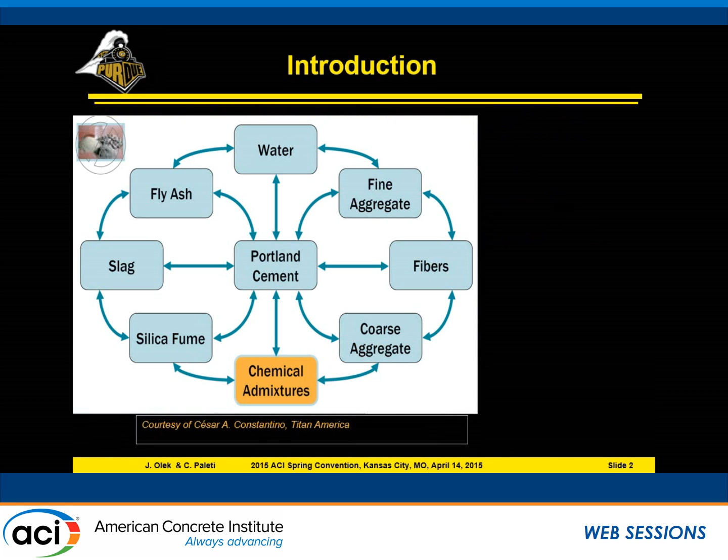What I wanted to share with you is part of rather extensive work that we've done on looking for coming up with a method of, maybe not so much predicting, as practically checking for potential incompatibilities with admixtures in modern cementitious systems. We know that modern mixes typically contain quite a few components, and once you start putting all of those components together, they don't always seem to work.

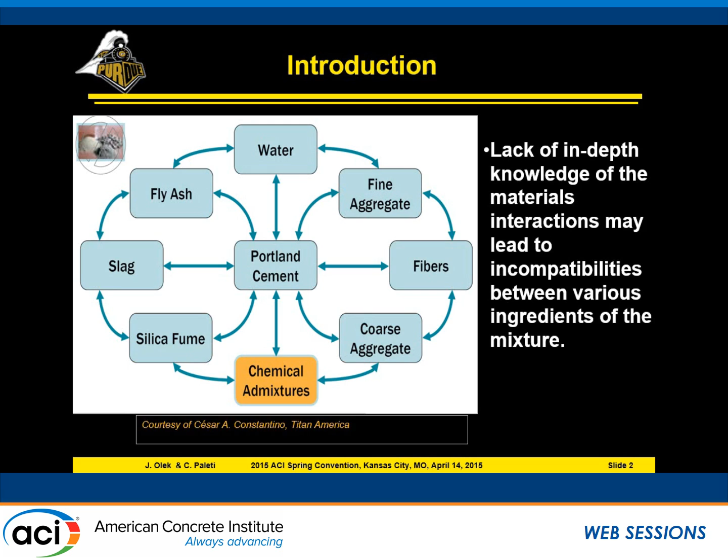Sometimes what happens is that you develop undesirable loss of properties, which we call incompatibilities. So what is compatibility? Loosely defining it as interaction of admixture with the cementitious system that doesn't cause any problems. Conversely, incompatibility would be a situation where, upon addition of a particular admixture, the mix does not behave as expected.

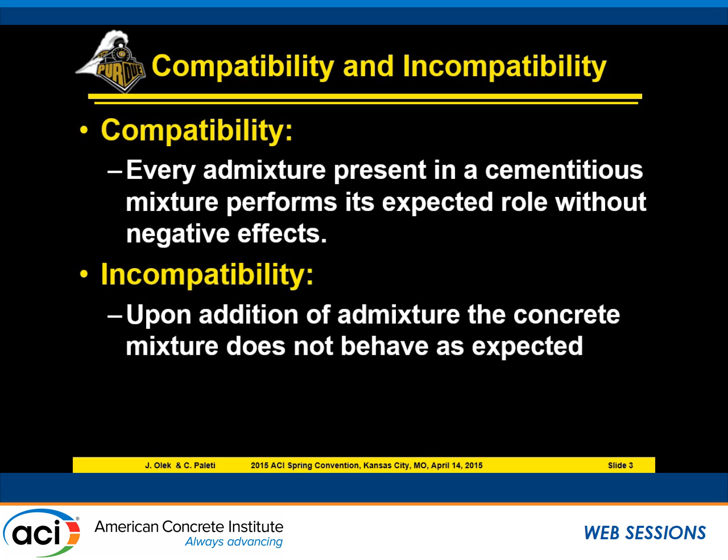Then you may get a phone call saying, what do I do? We switched the fly ash, we switched the cement, everything worked perfectly before and now it doesn't. Everybody realizes that the reason for those incompatibilities is really coming from the fact that the admixtures interact with hydrating cementitious systems.

We have a pore solution full of various ions that come from all the components, and chemistry starts playing a role. If the chemistry is not right, you will have incompatibilities.

So the effect of admixtures will depend on dosage and the type of admixture being used, the composition of the mix itself, as well as the composition of the admixture, sequence of addition, water-cementitious ratio, temperature, and finally compatibility of admixtures among themselves.

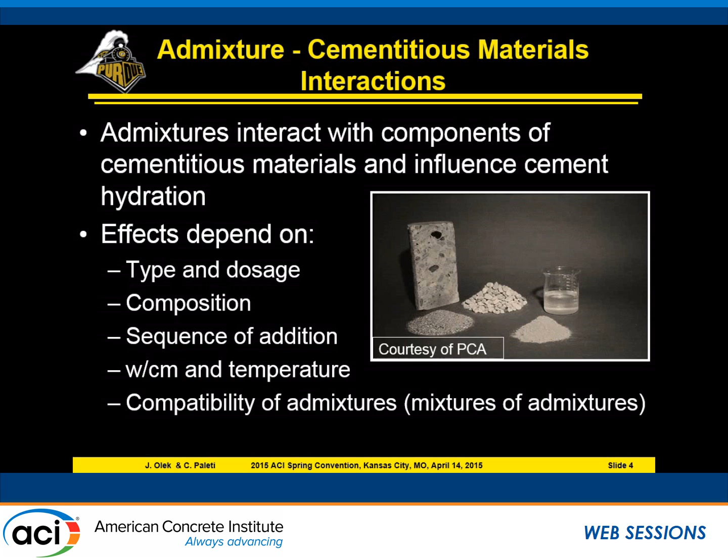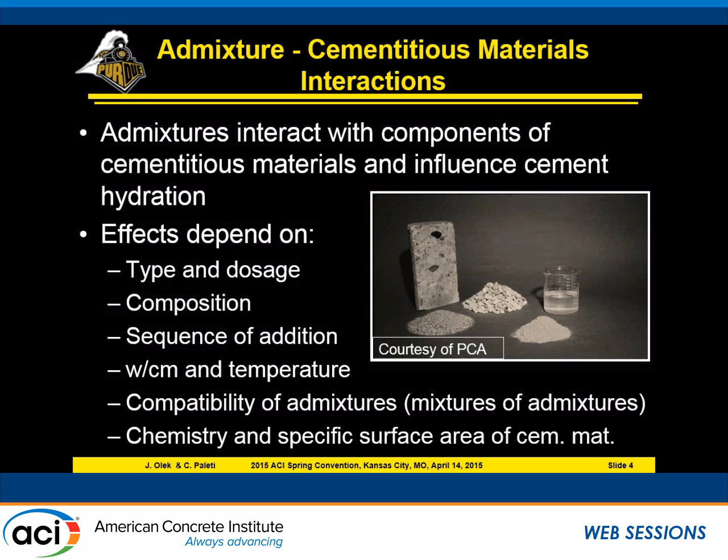If you buy the admixtures from the same supplier, typically those are vetted, if you will — they're supposed to work okay. If you start using an air entrainer from one supplier and a water reducer from another, that sometimes may lead to problems. Also, the chemistry of the cementitious material itself and its specific surface area may play a role.

So the issue of incompatibility among the components of concrete mixtures and chemical admixtures themselves is not entirely new, of course, and over the years the manufacturers of admixtures developed pretty robust systems that seem to work.

But just to give you a brief overview, with respect to early age properties, the incompatibilities that we see often manifest themselves as premature stiffening or severe set retardation. In addition, under certain circumstances with a specific combination of admixtures, you may have a problem entraining and maintaining the air void system.

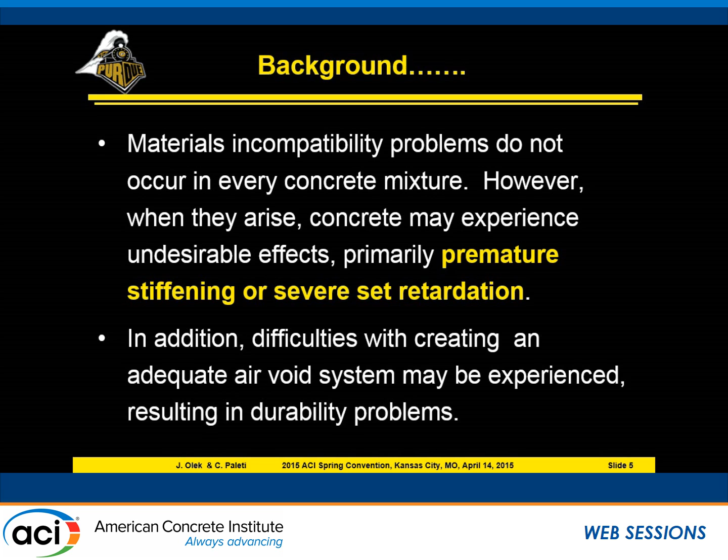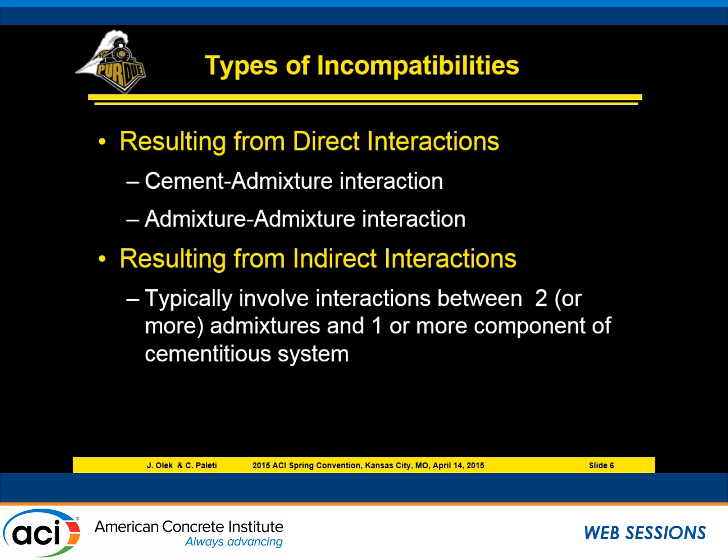If you start analyzing what might lead to those incompatibilities, you will quickly become aware that you may have cement-admixture interactions — that's pretty obvious. You have the possibility of admixture-admixture interaction that I already briefly mentioned. Or you can have sort of indirect interactions that are combinations of the above.

Let's look at some of the components that are really critical when you start talking about incompatibilities in these systems. The tricalcium aluminate plays a big role because that's the compound that starts reacting very quickly right after water is added to the cement. And we, in fact, make our cements with that in mind.

We are controlling the reaction of C3A by interground clinker with gypsum, right? But if we don't have the balance right, or if we don't have enough sulfates, or we have too much sulfates, we may have a problem. And if the admixture introduces sulfates to the system, that will upset the balance as well.

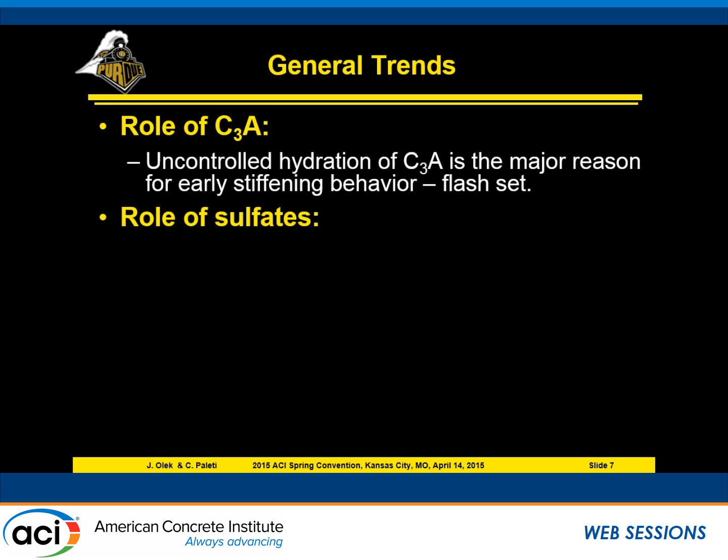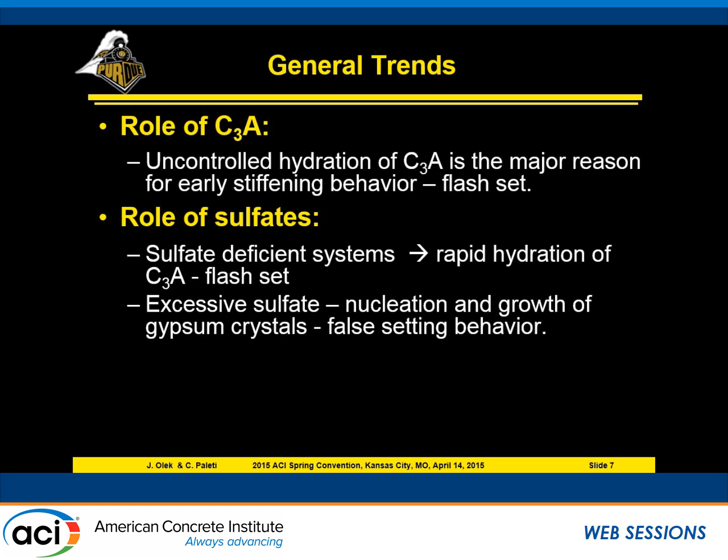So if you have uncontrolled setting behavior, you will have a flash set. Sulfates also obviously play a role because they control the hydration of C3A. If you have a system that is deficient in sulfates, you will have rapid hydration of C3A, and you will have a flash set. If you have excessive sulfates, you may have a situation where you start generating precipitation of gypsum crystals, and you have what we call false setting behavior.

Not only is the amount of sulfate important, but also how soluble the sulfate is — that is very important.

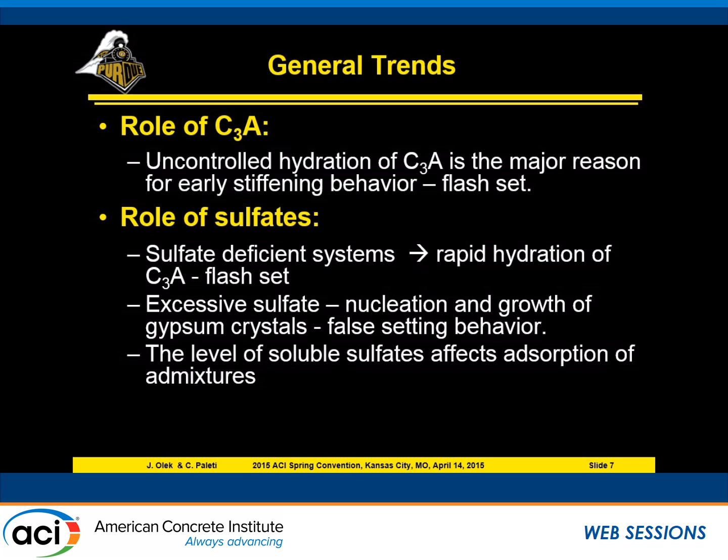So the form of the sulfate that you will find will be also of some consequence. As an example, I am showing the solubilities of 4 different types of sulfates that you may encounter in any cementitious systems. You can obviously have anhydrite, and whether it's a natural or synthetic anhydrite will make a big difference. Natural anhydrite is not very soluble. Synthetic anhydrite is comparable in solubility to hemihydrate or to gypsum.

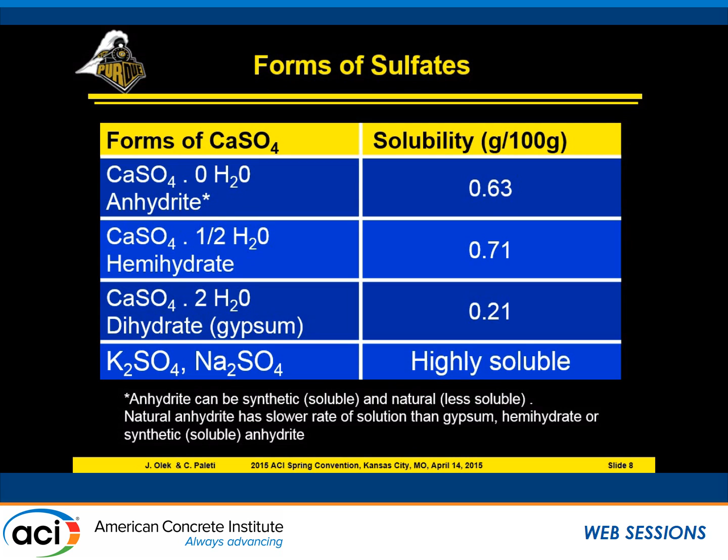Sulfates of potassium and sodium, which are always present in cements, are very highly soluble, and those sulfates come into the system very rapidly once you introduce water.

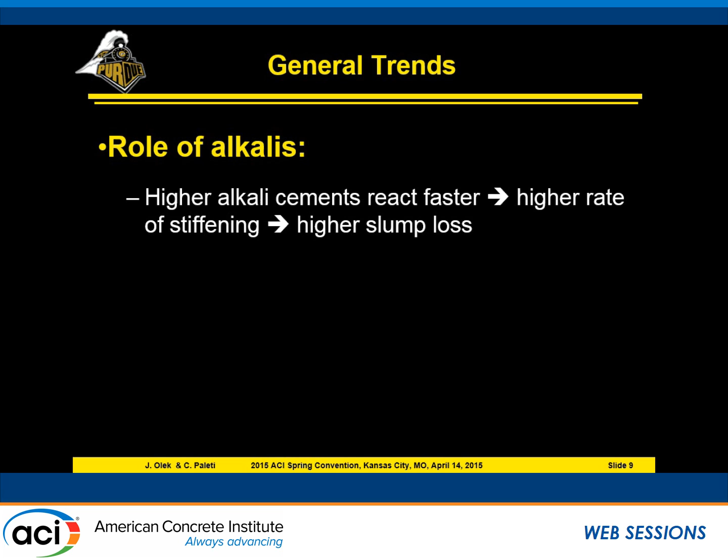Since we were talking about sodium and potassium sulfates, alkalis themselves, alkali metals, they play a role. You may have a situation when you have a higher alkali cement, the rate of hydration of those cements is going to be faster. Since hydration progresses faster, you will have the appearance of a higher rate of stiffening, and you will have a potential for slump loss.

With respect to the amount of admixtures that you would be adding, you will see that dosages are often in direct proportion to the alkali content of the system. If you have a low alkali content system, you will have also lower stability of the air void system. So everything is interrelated, right? In particular, if you have low alkali cement and synthetic air entrainer, you may have problems with strength loss.

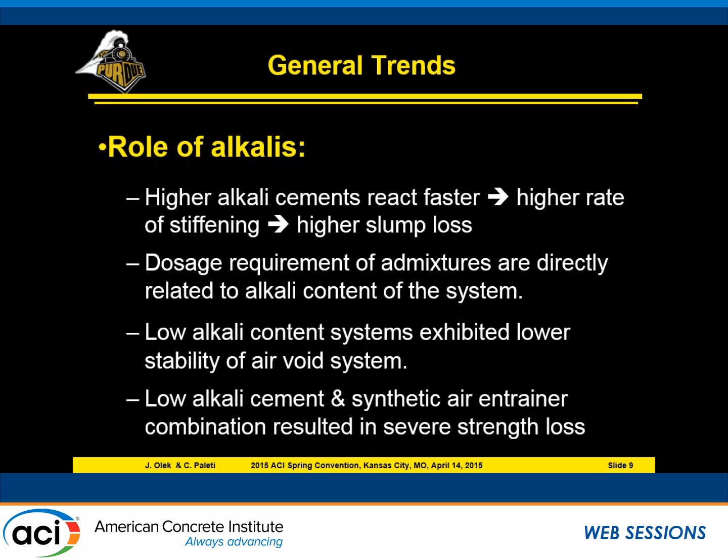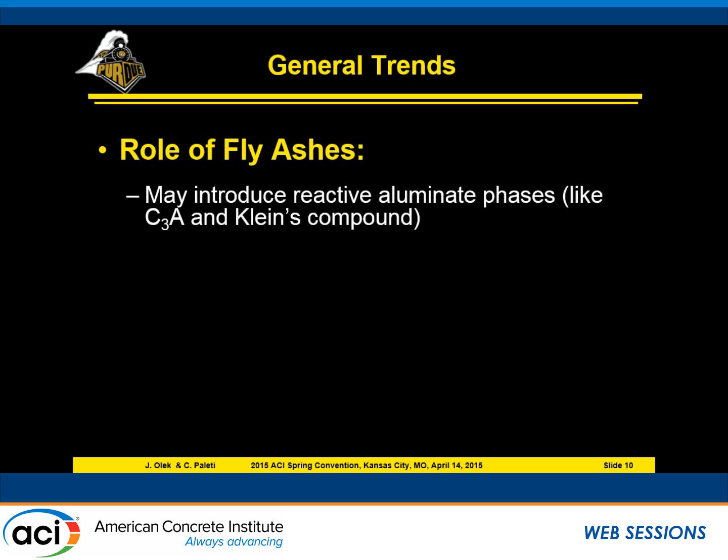We also have fly ashes or other supplementary cementitious materials. My talk today is going to focus on the fly ashes, so I will talk about the role of fly ash. We know that fly ashes are mostly aluminosilicate glasses with some other minor components, but they, among other things, introduce reactive alumina into the system, which has to be controlled in addition to the need to control C3A. They also introduce sulfates, and those sulfates, if they are soluble, disturb the sulfate balance.

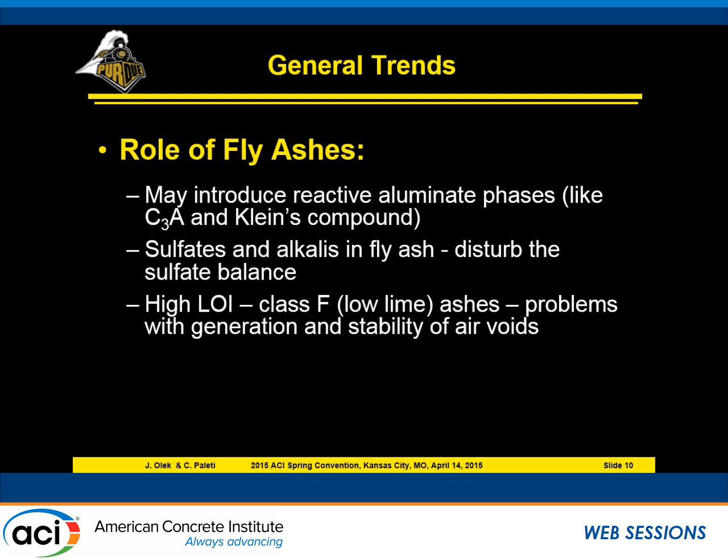If you have class F fly ash with a high loss on ignition, you may have a problem with air entrainment. Also, if you have calcium and magnesium in the fly ash coming into the system, you may have a problem with air entrainment because you may have some precipitates forming. These are chemicals that constitute the air entraining admixture.

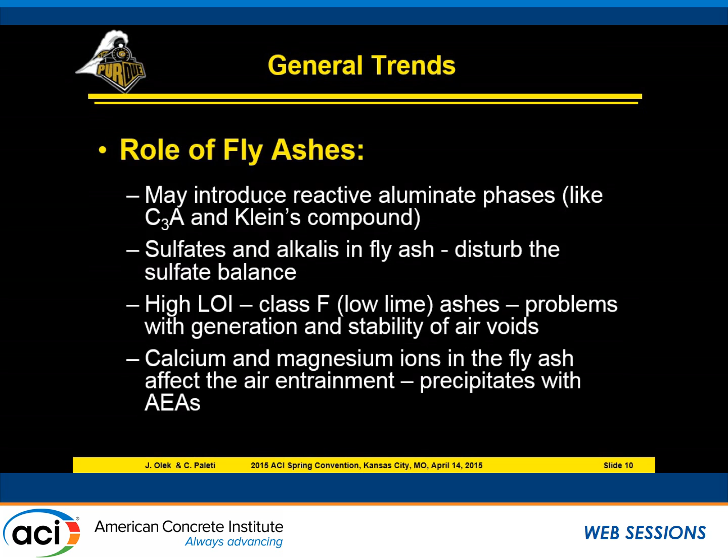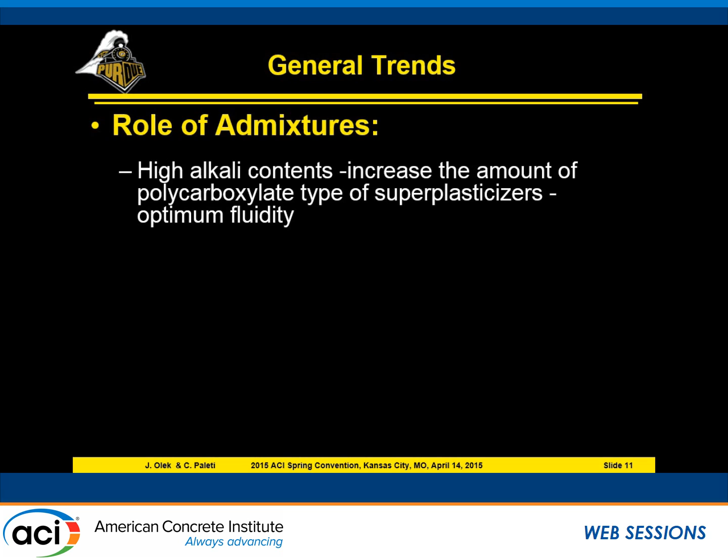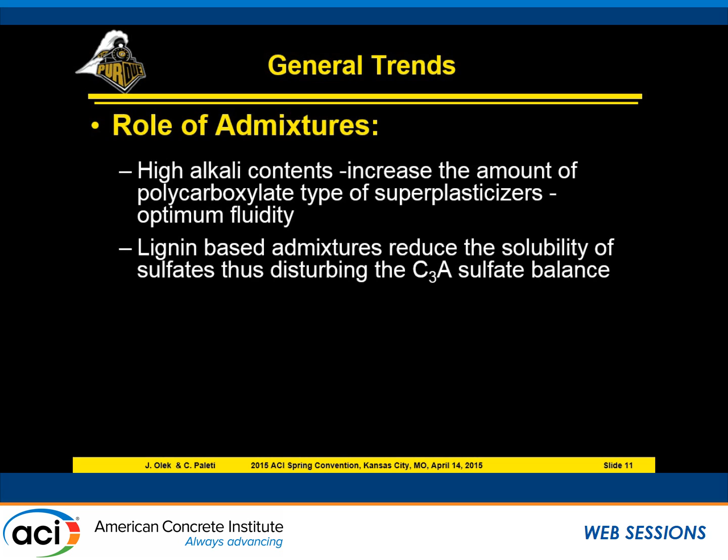So, to sum up, with respect to the role of alkalis, if you have a system with high alkali content, you typically have to increase the amount of polycarboxylate type superplasticizer to maintain optimal fluidity. If you have lignin-based water reducers, they reduce the solubility of sulfates, therefore they have a disturbing effect on the hydration of tricalcium aluminate.

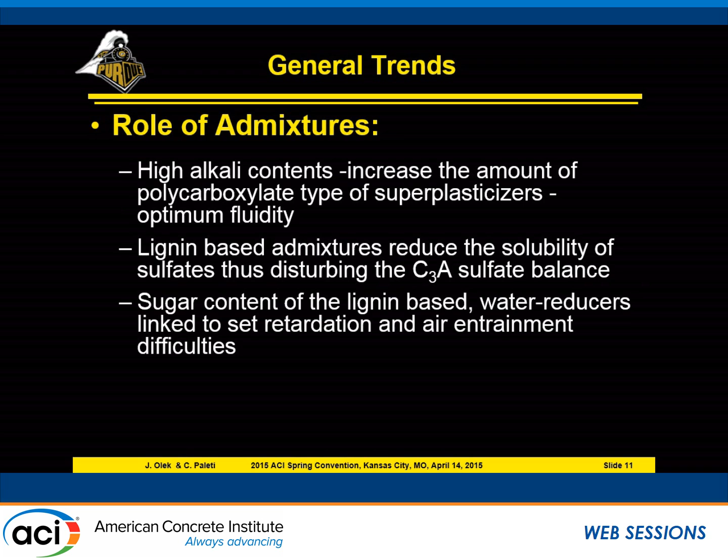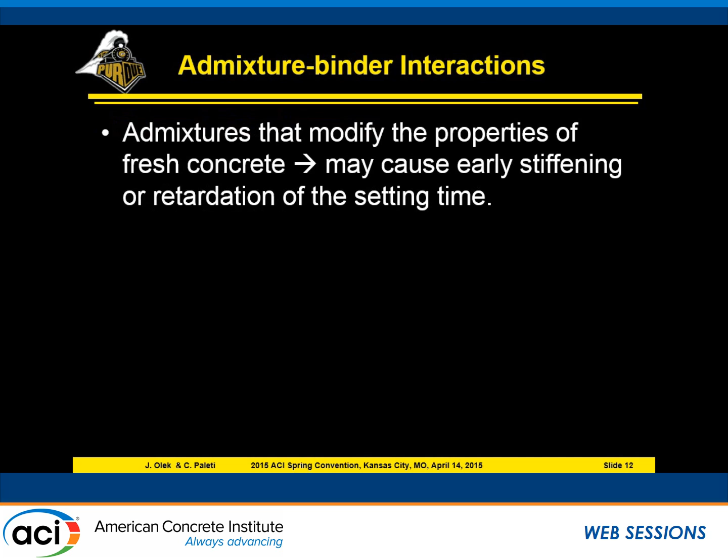Furthermore, if you have sugar in the lignins, you can have a problem with set retardation and also air entraining difficulties. There are admixtures that can modify the properties of the fresh concrete. Those interactions will affect stiffening or retardation of the setting time. Very often that change in stiffening is really a function of the rate of hydration of C3A.

There is also a potential problem with overdosing of the admixture. Sometimes either malfunction of the equipment or lack of attention by whoever operates the admixture dispensers may result in accidental overdosing of the admixtures. We look at that as well.

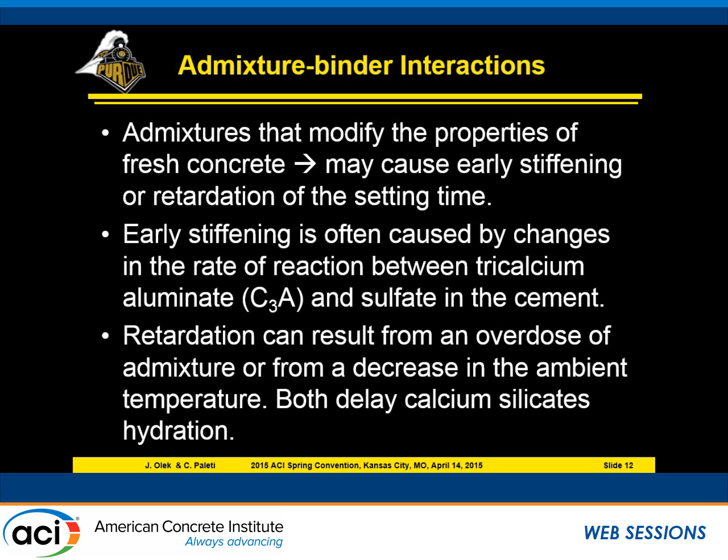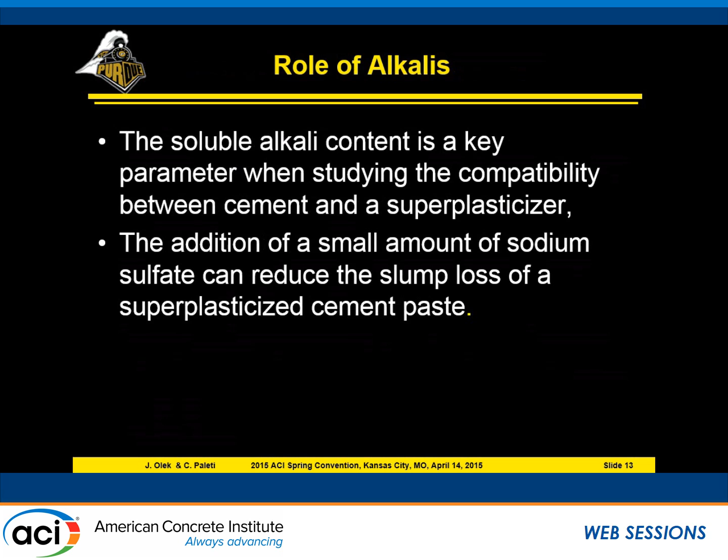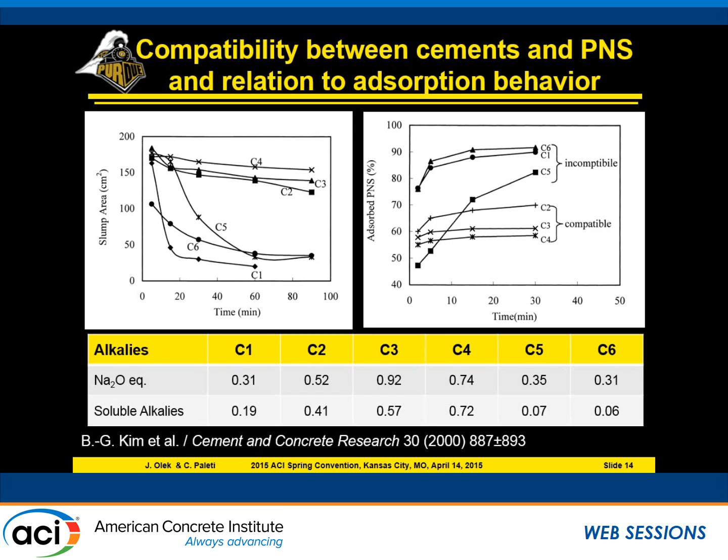But if you look at how the adsorption of superplasticizer or water reducer changed as a function of the chemistry of cement, you can see that C2, C3, and C4, which had high solubility, were compatible, versus C1, C6, and C5, which were incompatible. So not only the alkali content, but also solubility is important.

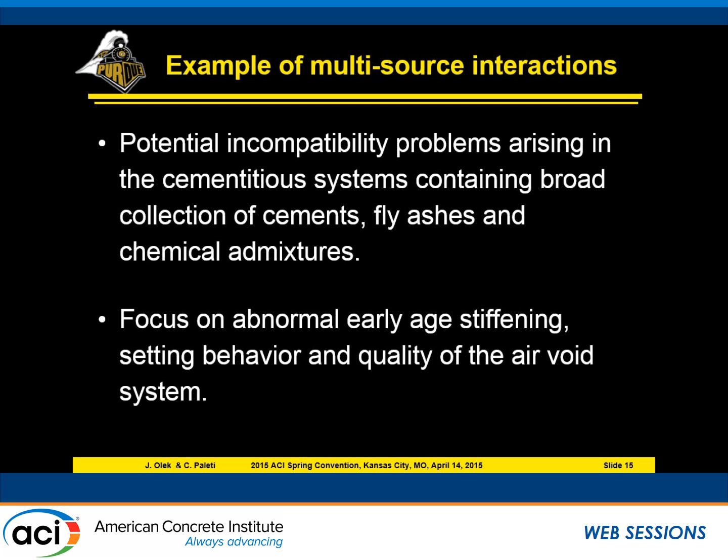So what I am going to do in the rest of my presentation is give you a quick overview, really an example of multi-source interactions and some suggestions on how those could be followed and potentially developed into a system that will prevent them from happening. So we will be looking at potential incompatibility problems in systems that have various cements, various fly ashes, various chemical admixtures. I will be focusing on abnormal behavior related to setting and also to the quality of the air void system.

So what we've done, we've collected 20 different fly ashes. We perform analysis of loss on ignition and chemical analysis. We also look at soluble sulfates and alkalis, particle size distribution, magnetic particle morphology, strength activity index, and so forth.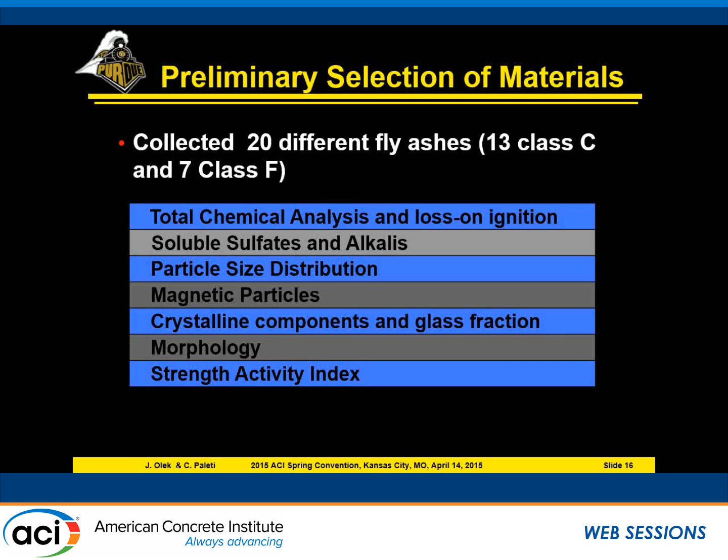13 of those were class C fly ashes and 7 class F ashes. You can see the range of chemical compositions and also a range of physical characteristics.

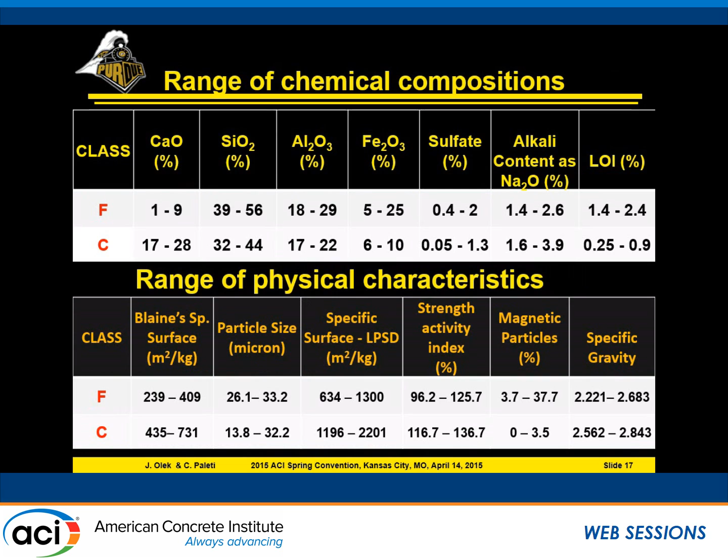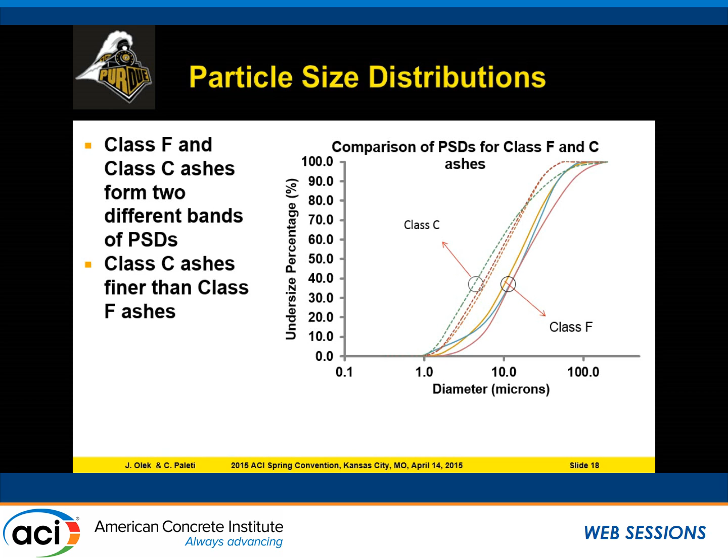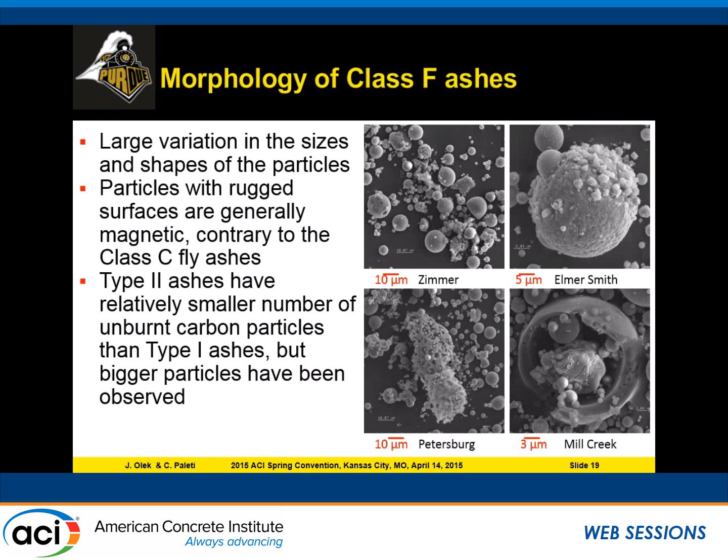A couple of examples of morphologies of class F ashes. The interesting thing I want to point out is that very often the deposits on the surface of the class F ash were not sulfates, but they were very often magnetic type of particles. That was in contrast to what we were seeing in class C ashes, where all those deposits that you see were highly soluble, either sodium or potassium sulfates.

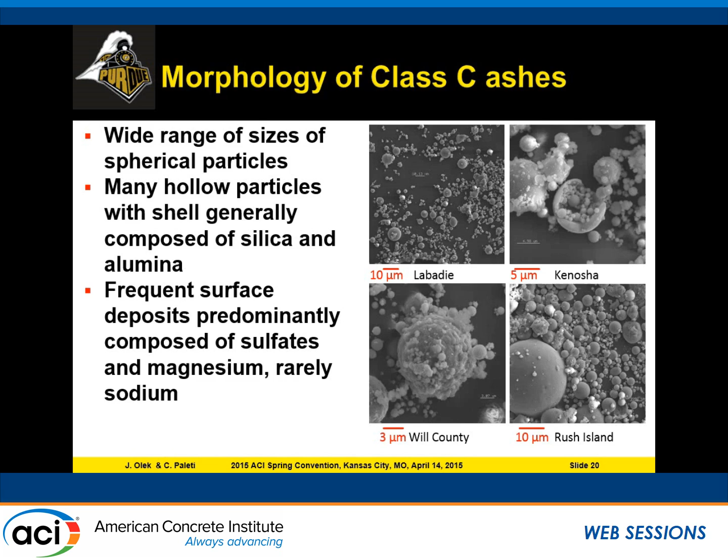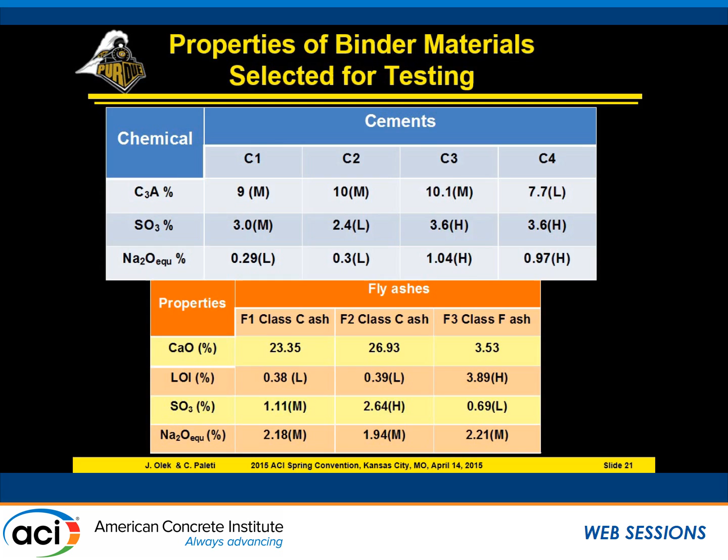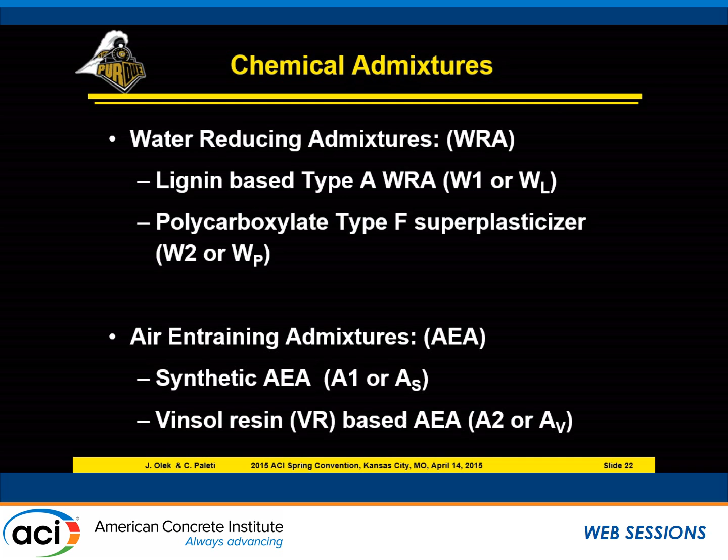We used 2 types of water-reducing admixture. One was lignin-based water-reducing admixture, WL, and another one polycarboxylate, WP. And we used 2 types of air entrainers. One was synthetic, and one was Vinsol resin.

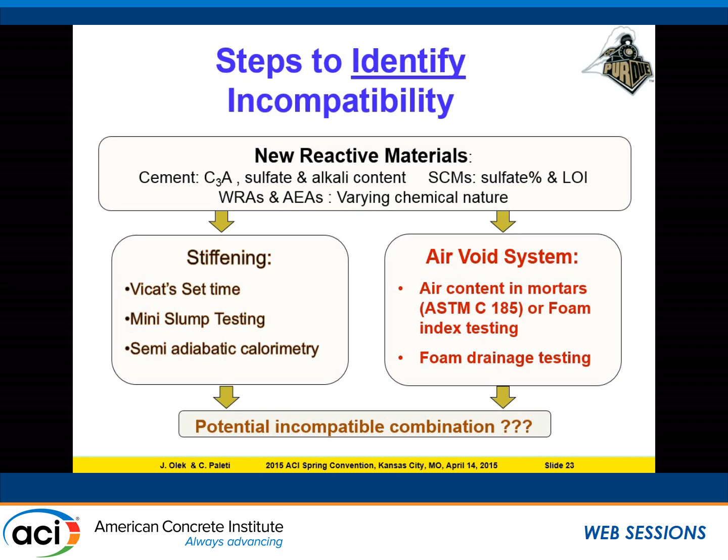So this was sort of a flowchart that we followed. We put the materials of interest together. We look at the stiffening parameters: VICAT, mini-slump, semi-adiabatic calorimetry. We also look at the air void stability using the foam drainage test. I won't have time to present that here, but we've done that. And we look at the potential combinations. We've done it on paste, we've done it on mortars, and finally we've done it on concrete.

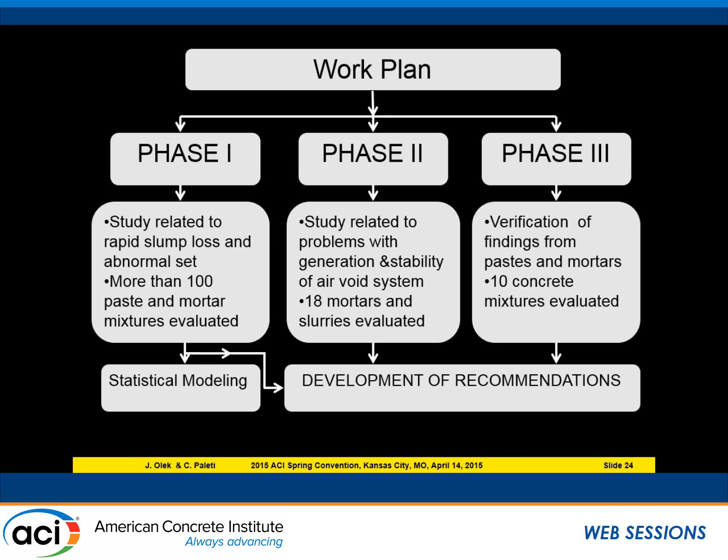We've done some statistical modeling trying to come up with the variables that seem to be statistically significant with respect to incompatibility, and developed some recommendations.

So with respect to mini-slump testing, we developed 2 indices. One of them we called the false set index, which was the area of the patty after 5 minutes over the area at 2 minutes, and if that was greater than 1.3, we deemed that to be illustrating a false set. Then we also have a stiffening index, area at 30 minutes versus area at 5 minutes. If that was less than 0.8, there was a flash set.

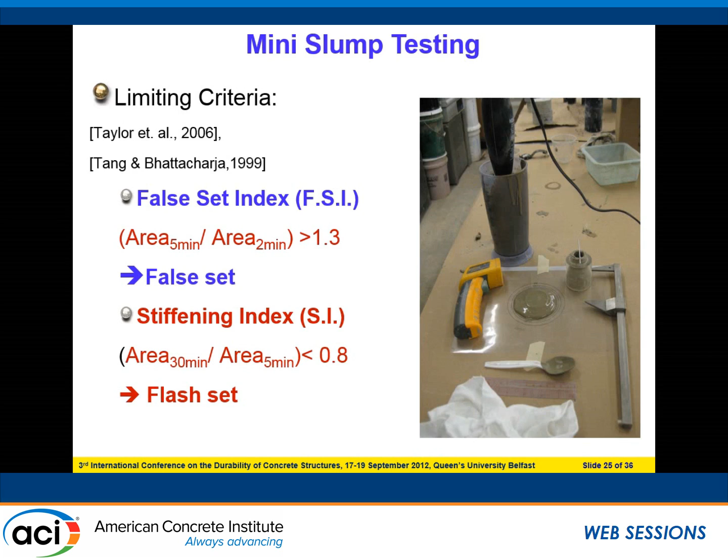We also looked at the semi-adiabatic calorimetry. We look at the pastes, in this case mixed according to 305, and we came up with a set of criteria that one can argue, well, those are your criteria, how do you know they are going to work? We try to be very reasonable and encompass as many potential variables as possible, so this is based on some statistical evaluation of our data.

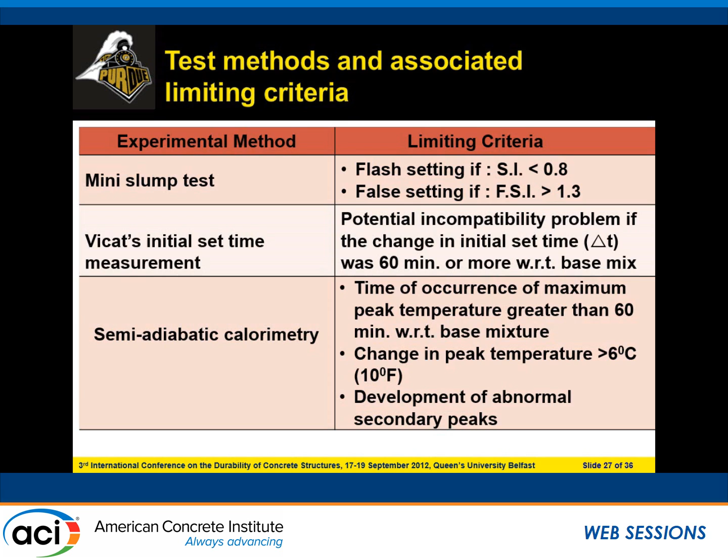I already mentioned the mini-slump test, and those are, if you will, the performance criteria. We also have performance criteria related to VICAT initial set time, mostly if anything was delayed or accelerated by more than 60 minutes, we consider that to be abnormal behavior. And we also had some criteria related to semi-adiabatic calorimetry.

So just a couple of examples. You can see those boxes representing changes, in this case initial set time, with respect to the control mix. So this is a control mix. After adding one of the fly ashes, we reduced the set time, accelerated right at the border, according to our criteria, 60 minutes. Then if you start looking at the additions of various admixtures, we created a very fast setting system, right?

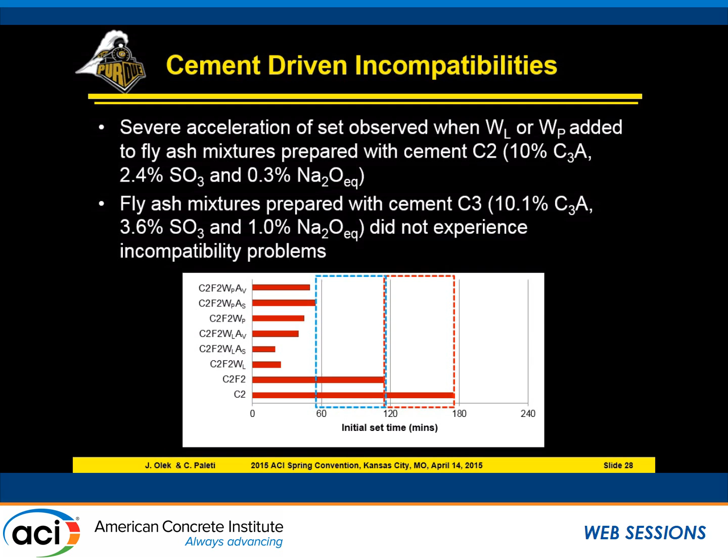So you can go back to the chemistry of the cement and look at the type of admixture and start drawing some conclusions about which components of the system maybe didn't work out properly. You can supplement those observations by looking at the hydration process itself.

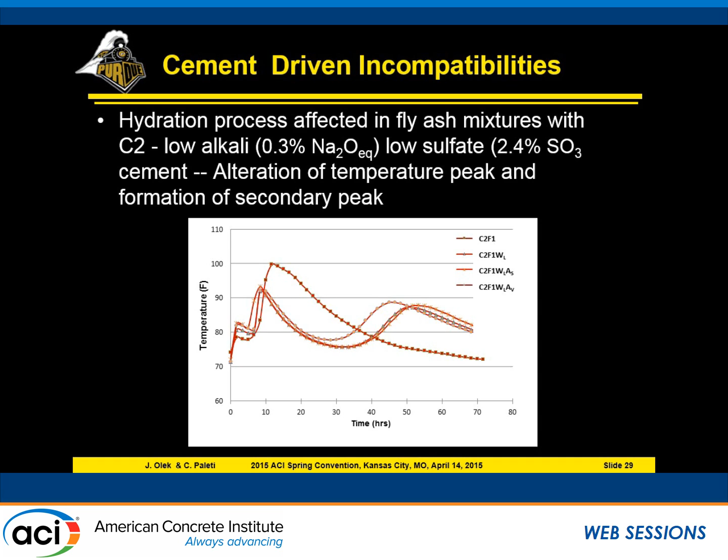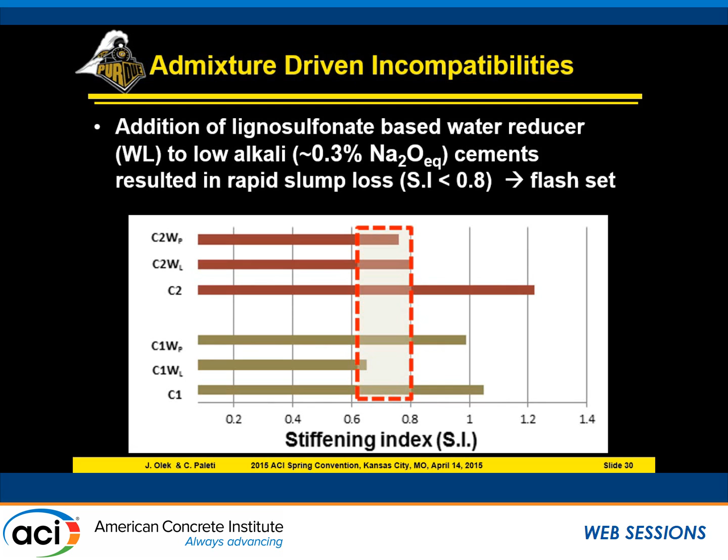This curve represents our system without any admixture, simply cement and fly ash F1 in this case. You can see that when we start adding admixtures, we are changing the chemical response. The rate of hydration is changing, the heat evolving is changing. We are generating a second peak, an indication of sulfate imbalance created in that particular system. We observed that kind of behavior in particular with respect to lignosulfonate-based water reducers - they were universally giving us a pretty high likelihood of premature stiffening.

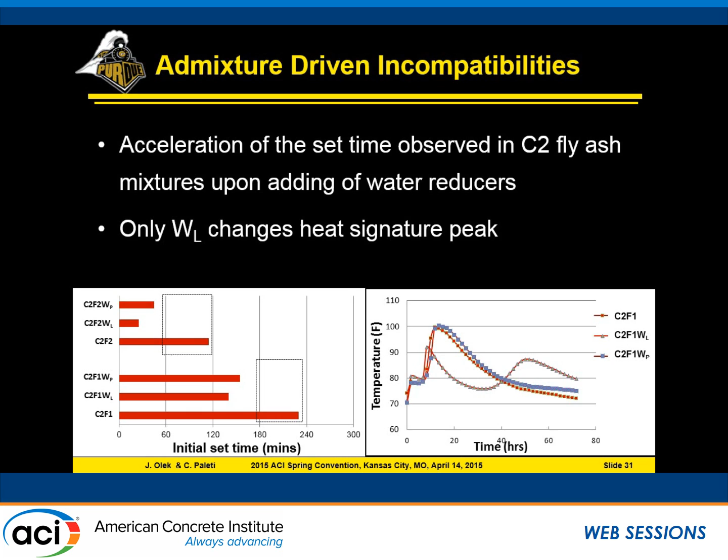We also observed the same kind of relationships with respect to one of those cements in particular, cement C2, which was a low sulfate cement. We also looked at the amount of fly ash added and how that would change those balances and perhaps offset the stiffening or setting time.

You can see the additions at 20%, 30%, 50%, and 70%. Sure enough, we've seen responses indicating that the hydration process and response of the system changes. We had about 18 mixes - I'm not showing all of them here, but 94% of those with more than 30% fly ash showed significant acceleration happening. Again, that's attributable to the sulfate and aluminate that was brought in, upsetting the sulfate-aluminate balance.

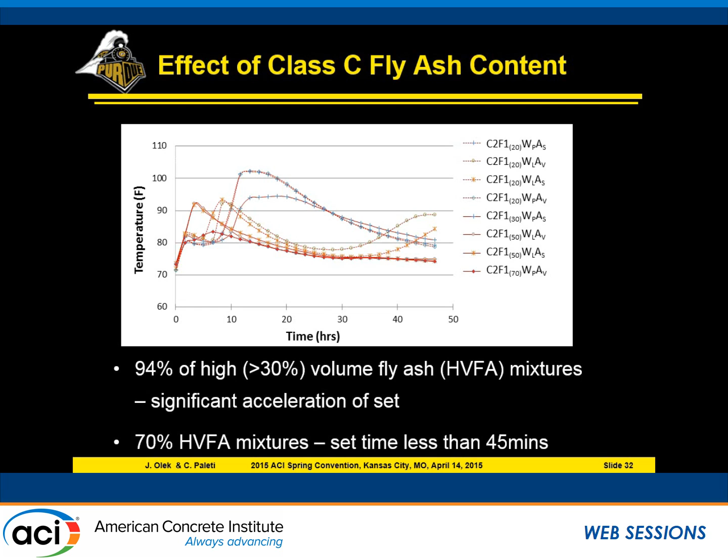70% of those 18 mixes had set times less than 45 minutes. So obviously that's a problem if you want to hold the concrete, place it, and finish it.

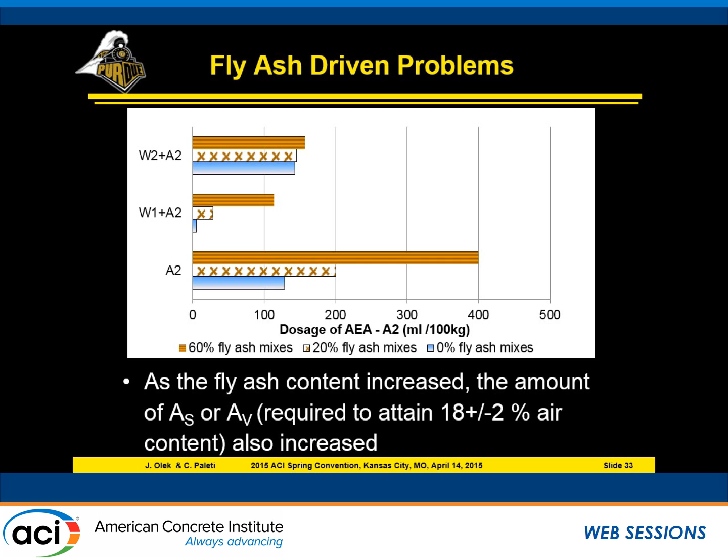This is an example of how fly ash content changes the amount of air entraining admixture nominally required to attain about 20% air in the mortar. The basic observation is that with certain air entraining admixtures and certain fly ashes, you either see a great increase in the amount of admixture needed, or with a different water reducer and air entrainer - or even the same air entrainer used here - it didn't essentially change the thing. So it is all over the place; you cannot really easily predict.

The general observation is that at 20% replacement levels by Class C fly ash, we will have false setting behavior in some combinations that otherwise were compatible. This is driven by the combination of the chemistry of cement and fly ash. If we have a lignin type water reducer and low alkali cement - in this case C1 and C2 - we will have false setting characteristics with fly ash F1, but not with fly ash F2, due to the chemistry of those particular compositions. In certain combinations, changing the fly ash source significantly altered the timing and hydration characteristics of the base mix.

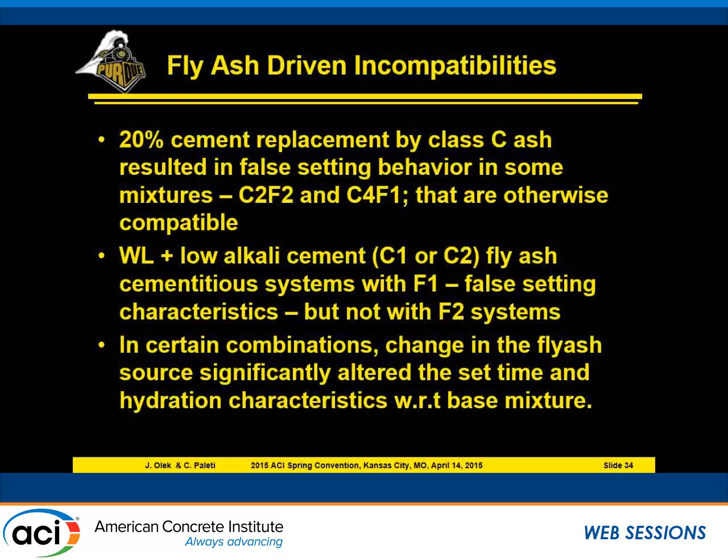So if you are suspecting, based on the general trends I described, look at your composition of cement and fly ash, check the content of sulfates and aluminates, and say that might be potentially incompatible.

Try making trial mixes and vary one of those variables at a time. Select fly ash with different chemical properties and see if that causes any changes. Maybe change the type of water reducer or air entrainer - that would be with respect to stiffening and slump loss. With respect to the air void system, if you have that opportunity, try to select fly ash with different levels of carbon - that seems to be a common problem. Or maybe change the percentage of replacement, or change the type of air entraining agent.

In other words, you have to go and try and check the new combination of materials for incompatibility using some of those tests and suggested performance characteristics that were presented here.